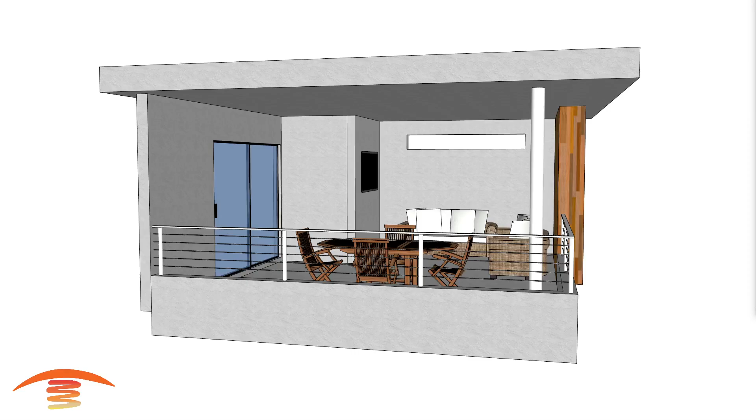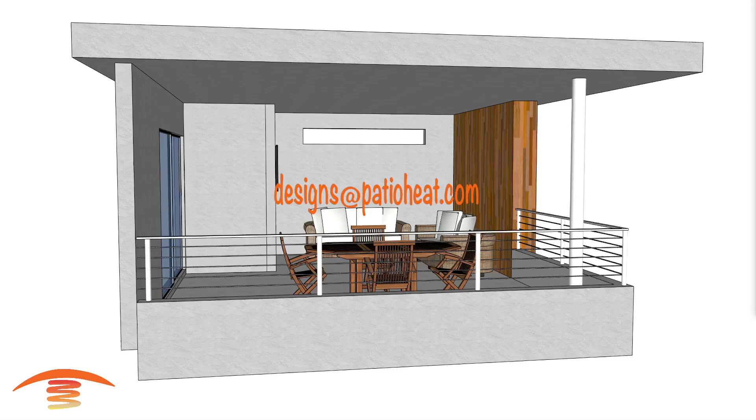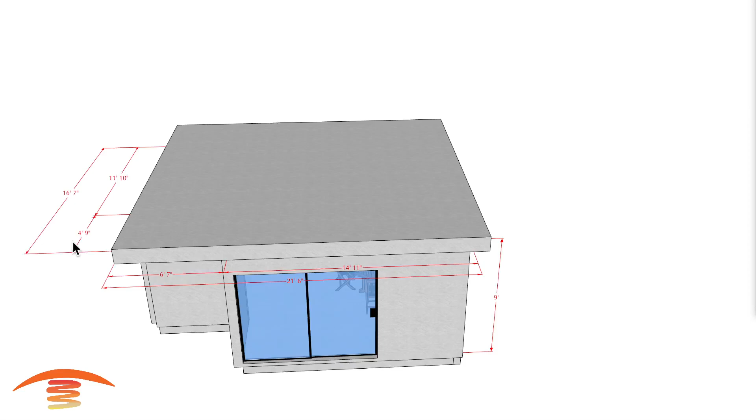Now let's get heating. All right, so we have this residential application here. Let's go right into the overall dimensions that I have. So overall dimensions, I have a 9-foot ceiling. I have this section here about 21 foot 6 inches from end to end, but there's a wall here at 14 foot 11, and then another section over here at 4 foot 9. So the overall length here is 16 foot with an 11 foot 10 section here of this wall

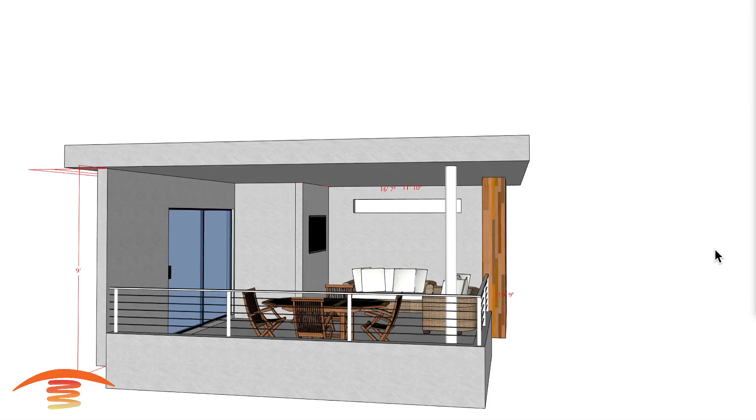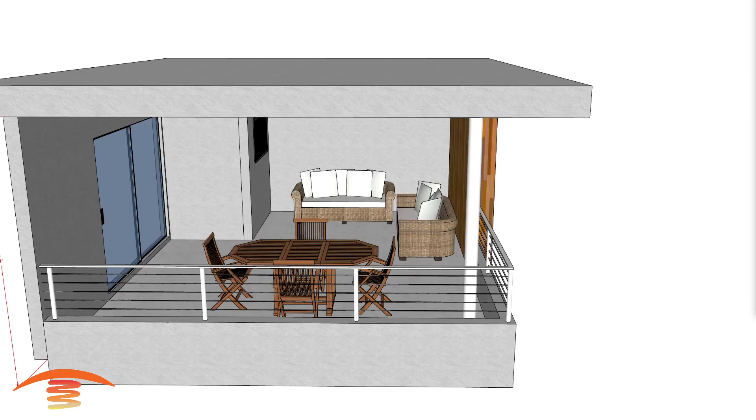from here to inside here. All right, what they want to do is put in some flush mount kits and install them in the ceiling here. So let's go ahead and look at a couple of different options that I might recommend. Now, the sitting position is kind of important to note, where the majority of people are going to be sitting and where the actual amount of heat you're looking for is to be placed. So I'm going to go ahead and just utilize, I have a table here, and then I have some seating out here on the perimeter on this edge over here. So that is going to be kind of important to note.

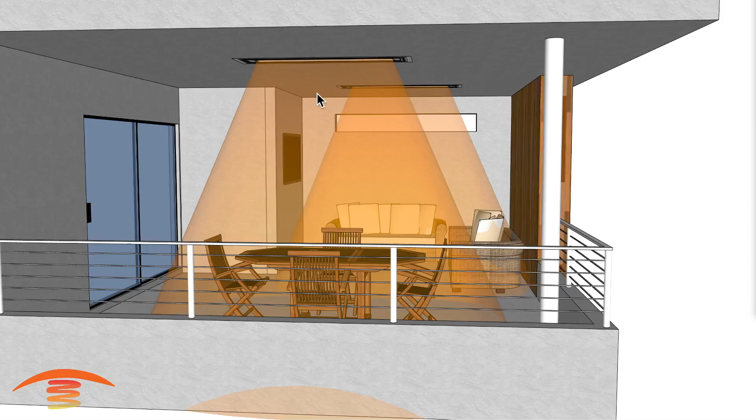Let's go ahead and look at one option, which would be utilizing two. I'm going to go ahead and take off the top here for a second and put on a new top. And that's going to be utilizing two of the 6,000 watt W series with a flush mount kit heater, and they have two elements in them. They're 6,000 watt, 240 volt and 25 amps a piece.

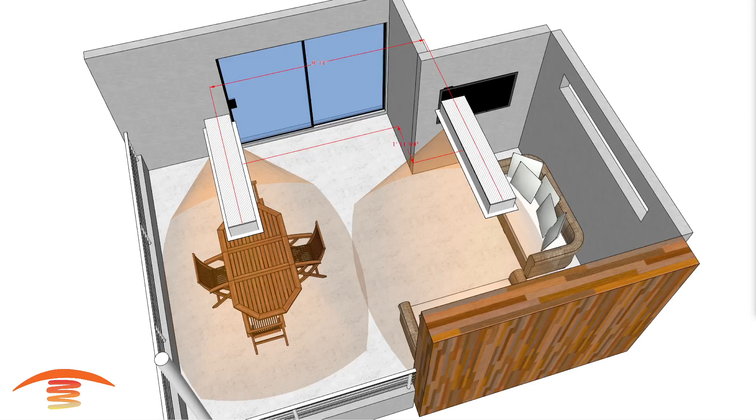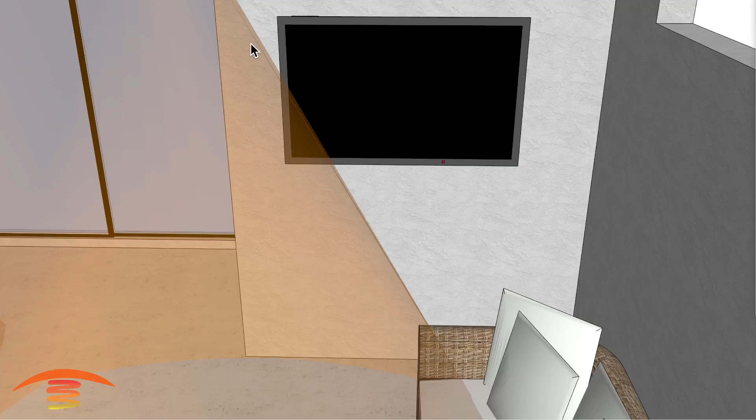Let's go ahead and look at the footprint of heat. I'm going to remove the top here for a second, so we can kind of see what footprint of heat you're getting with something like this. So you can see here that we're not really heating up this space here 100%. Now there is going to be some rays that do travel from the heater itself out in this area, but it's not going to be the most ideal footprint of heat for the sitting position.

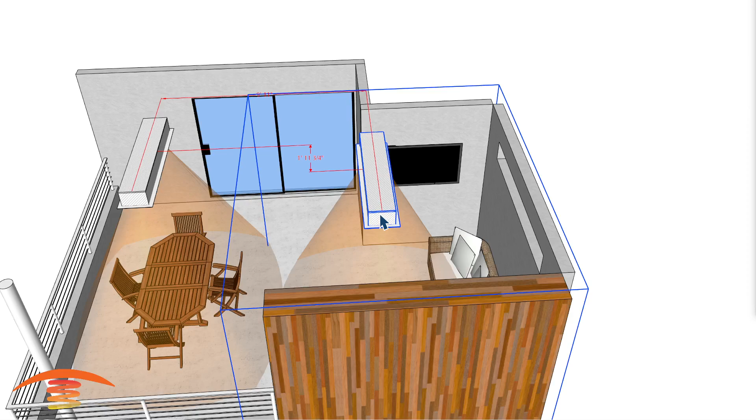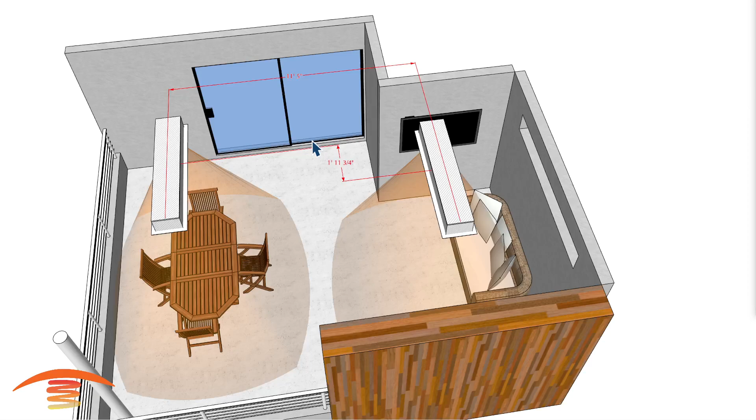So you can see I have right now from the center point of the entire space, I have the heaters that are going to be 9 foot 11 inches center to center on each heater. We could move this one over slightly, maybe 12 inches, or maybe even 16 or 18 inches, and that footprint is a little bit better over here, but now we're missing here in the center. So again, knowing what that true seating position is going to be is sort of important for this.

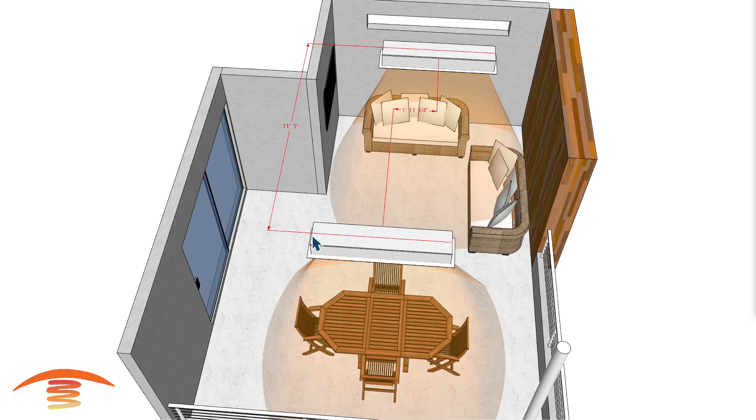You can see here now we're at 11 foot 5 inches center to center on the heaters in this fashion. And also this heater here is centered within this span here. And then what I did was I off-centered the other heater by almost 2 feet to the left here, so that it's more centrally located over here. I think that's about it for utilizing two of the 6,000 watt units.

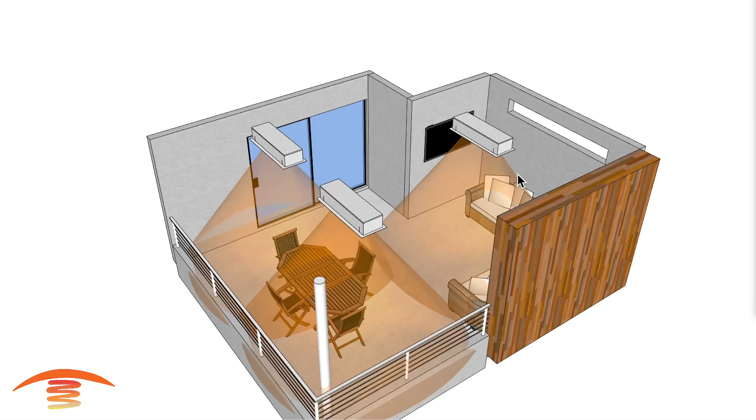Let's go ahead and look at a different option. A different option would be possibly utilizing something like 3 of the 5,000 watt units, and I have them pretty much located in the same location. Again, the seating position over here is kind of not heated, but if this is not a seating position, this is going to be okay. But let's go ahead and look at the distances I do have.

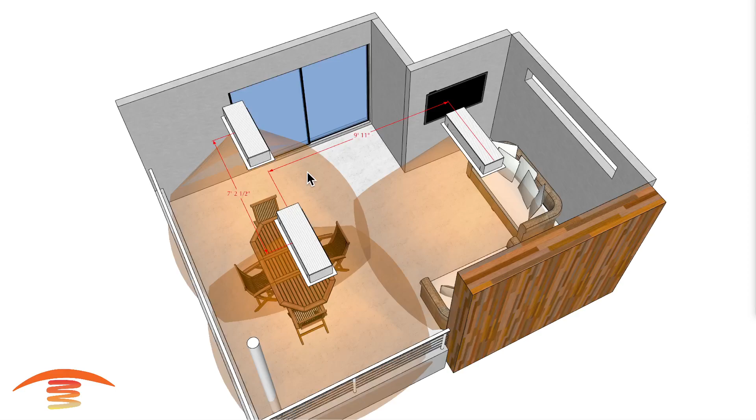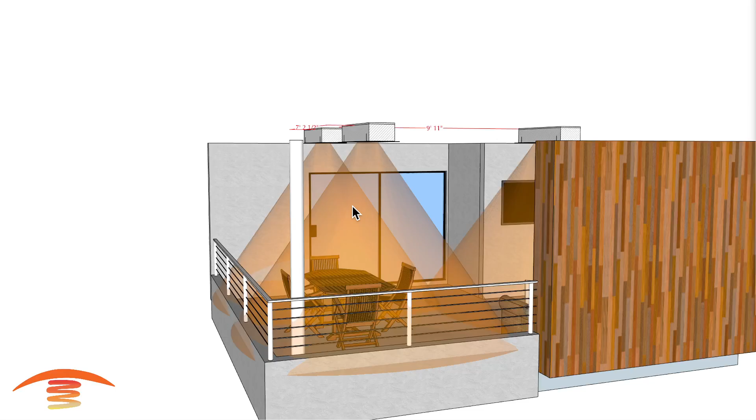So again, 9 foot 11 from center of the entire span here, left to right, and these are now offset from the center position of the patio at 7 foot 2.5 center to center on each heater, and this gives you a much better footprint of heat in this space right here. So this is probably my more preferred application, utilizing 3 of them if that's possible. And I want to do one more dimension on the distance here. So let's look at what that distance is from here to here.

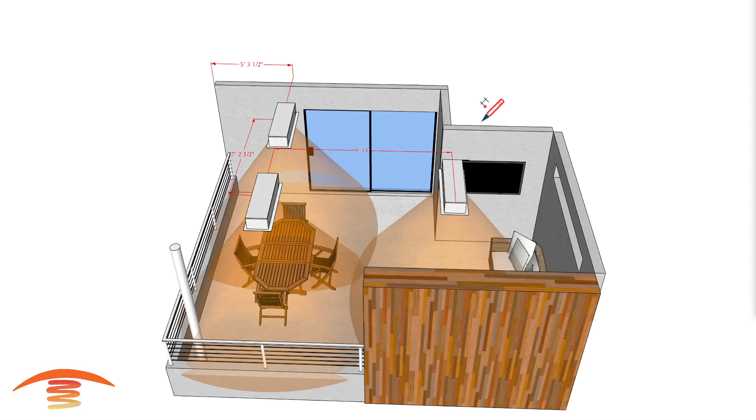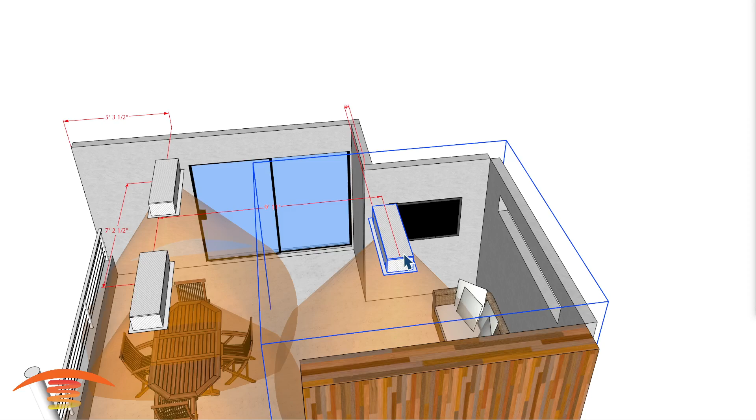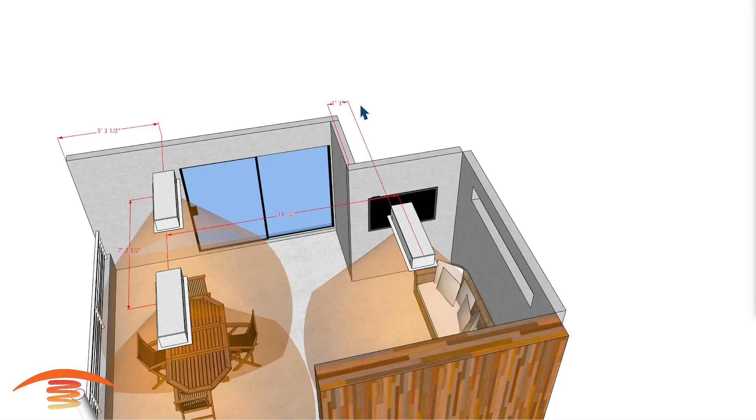We have 5 feet 3.5 inches, and then let's see how far off we are here. That's just 3 inches off, set to the edge over here, 3 inches off. So again, this could be moved back or forth depending on what you're really looking for. If you're looking for more overlapping here in the middle, that would be a better idea. But if you're looking for some more heat on this side here, maybe 18 inches would be a better idea. So from here to this edge is 1'3". But again, we're missing a little bit of this right here.

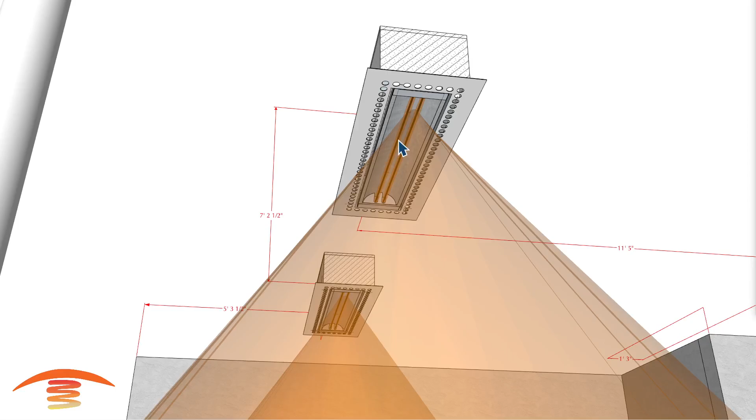Now, the other thing I want to say is these are pretty hot units for an application like this. I would recommend either utilizing what they call a duplex switch, which allows you to turn one element on, one element off, both elements on or both elements off, and or use a control system where you can dim the heaters down from basically 10% on all the way up to 100% on, and that would be my preferred part of the application. So let's see if there's anything else here. I think that's about it. All right, well, I hope this has helped.